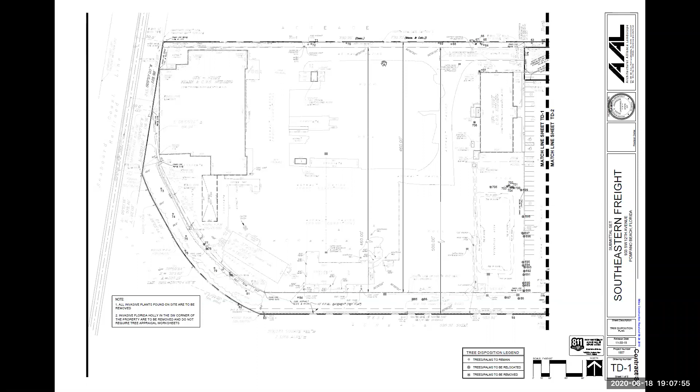You really good, you have to be bigger. Oh, okay. Alright, so I'm sharing my screen, I hope everyone can see it. Now this is a job in Pompano Beach.

This is a TD sheet. If you don't know what a TD sheet is, I'll zoom in here. It stands for Tree Disposition Plan. You'll always find on the right-hand side or on the bottom, depending on the architect, what you're looking at. So this is a tree disposition plan, the date, project number, TD1. It should show you the job name, the address, the location, the set of plans.

It should show you the set of plans you're looking at, and there should always be a column for revisions, sealed. If you're a landscape inspector or plan reviewer, you should want to make sure that it's sealed by the landscape architect. If it's not sealed, it's like an immediate rejection.

Anyway, so looking at a tree disposition plan, you should have a key. That is what every disposition plan has. There are 3 things that all landscape plans have, and these are the most important: a key, a scale, and a north arrow. Every page should have it. If they don't, you'll be completely lost as to where you are, how far things are, and what you're looking at.

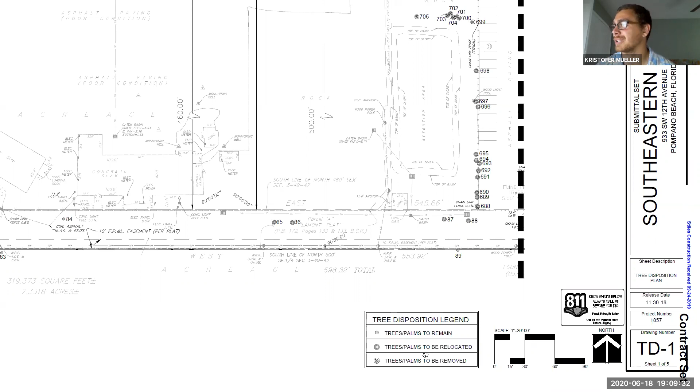So for instance, this tree disposition plan, there are 3 things you can do with trees: they can remain, they can be relocated, or they can be removed. Your scale factor on this plan is a 1 to 30 inch scale. Now on a PDF it looks like you can't really tell if that's right, but when you print this out to size, you could always get a scale bar, and if it's 1 inch equals 30, you go to the 30 scale, and that measurement right here should actually equal 1 inch. And then north is up, so when you're on the job site, you know north is up.

Architects always put notes: all invasive plants found on site are to be removed. Invasive Florida holly in the southwest corner of the property are to be removed. And then here you start your inventory of trees. Each tree is numbered, each tree falls under the index of what's going to happen. So just to recap, nothing around the dot means it's to remain, double circles means it's to be relocated, and an X means it's to be removed.

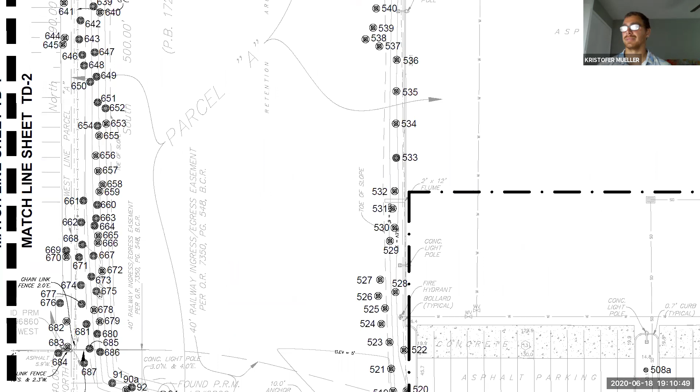So as you can see, all these trees, 85, 86, 533, 34, these are all to be removed. And that way you can see here's a nice big cluster of trees: relocate, relocate, relocate, remove.

And each number will tell you what the tree is and what is going to happen to it. At the end of your tree disposition plan, there should be multiple pages of it, and the last page should show you the list of trees. So here's a pretty big size project, pretty big list: 102 bottle brush, or sorry, just another one, 451 sable palmetto.

So here you can essentially go down the list, see what is going to happen to it, see the comment by the arborist, the species rating, the appraised value. All this is necessary for when you're doing plan review.

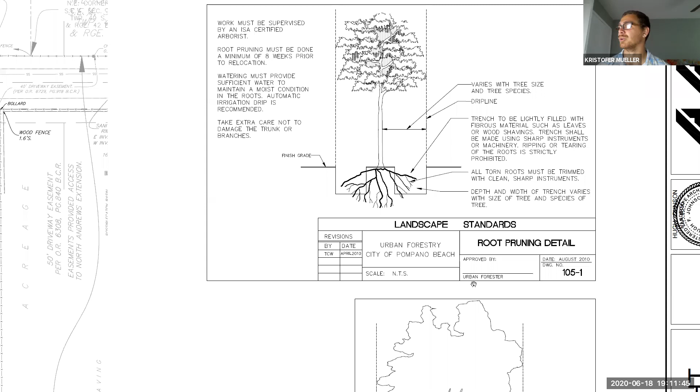Here you can see some details that the architect chose to put, root pruning details. Here they're telling you they want the depth and the width of the trench may vary. All roots must be trimmed. Root pruned out to the drip line, varies with tree size.

Here you have a tree protection detail. Every city has their own details that they want for their protection. This one wants safety barrier fence, fluorescent orange, 2x4 pressure treated. Here you can see they want 2 feet buried under the ground with 4 foot minimum above ground on 4 foot centers. So here they're telling you exactly how they want their tree protection to be. And this is directly pulled from the city of Pompano.

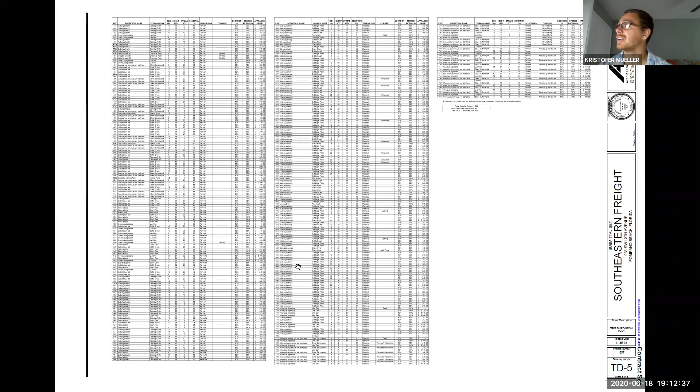Moving on, when you're doing a plan review, if you end up doing this in a city, you can almost always skip to the last page where they have to provide you with a chart. Here, their chart's very simple. Total trees to remain, 564. Total trees to be relocated, 96. Total to be removed, 117. Existing and proposed trees exceed the number of required trees for the site. No mitigation is required. So they're telling you that they've gone above and beyond the requirements of the site for what's to remain, and they're telling you we don't have to mitigate for anything.

Does anyone have any questions on a disposition plan so far?

I lost the chat room. Can you hear me? Yep. No, I have no questions. I didn't know if you could hear me. Oh, yep.

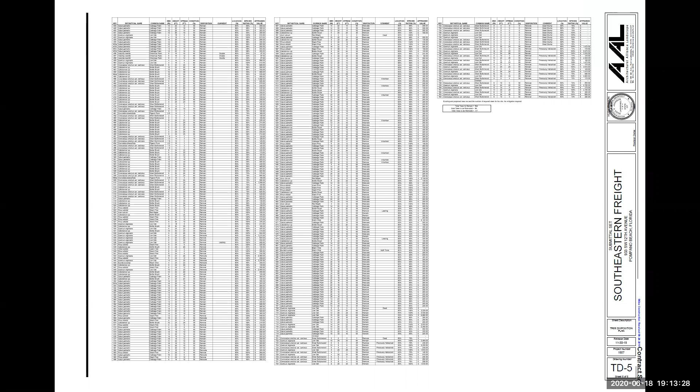Anyone have any questions? No? Moving on.

Just a typical tree disposition plan. What you guys will look for, some disposition plans will show you the new location of all the trees to be relocated. Some of them don't. This one, for example, probably because there's so many things being relocated, doesn't show you the exact locations. If they don't show it on the disposition plan, it's because they're going to eventually show it to you on the landscape plan. So from here, we will go to the landscape plan.

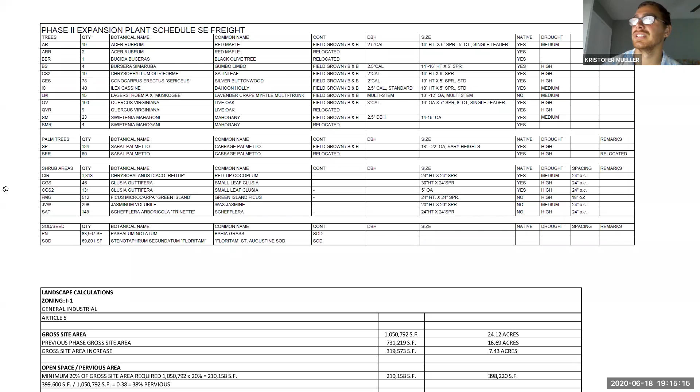Now I'm going to skip to the last page real quick. So here's the last page, and typically you'll find the plant list on the last page of the landscape plan. So here you can see their plant list. It'll always be broken out into trees, then palm trees, shrubs. Usually you'll have ground covers and then sod. Here you can see the code that they'll be represented by on the plan, the quantity of them, botanical name, common name, how they want the tree.

So do they want the tree in a container? Do they want it field grown? Here it can range from field grown, balled and burlap. It can be 65 gallon, 200 gallon, 25 gallon, 35 gallon. This is where they're gonna specify how they want the trees to be grown.

Here you can also see QVR 9 shows you 9 oak trees that are gonna be relocated. So following up from the tree disposition plan, if the oak says QVR on it, you know that it's relocated from the tree disposition plan. Same thing with the mahoganies. SPR is 80, so it's 80 sable palms that are going to be relocated. And then here you have your shrubs.

Container - right here in container, same thing. You'd have 3 gallon, 7 gallon, 1 gallon, 15 gallon. The architect here has chosen to not put any gallon size, but they have spec'd out a height size. So you'll look at cocoa plum, Chrysobalanus icaco. They want it 24-inch height by 24-inch spread, and they want it planted 24 inches on center.

So when you look at the landscape details after, they're gonna want these spaced every 2 feet on center. Clusia, 30-inch, 24-inch. So as an estimator or a project manager or anyone, when you see a 30-inch Clusia, you know that's not gonna happen as a 3 gallon, maybe even not as a 7 gallon. This is where, from your experience or from doing a quick search - I like to use PlantAnt - you can search what nurseries are growing and what their stock is at. You may have to bid it as a 15 gallon or a 10 gallon to get that 30-inch height, because most cities, especially Pompano, Sunrise, Plantation, they'll take out a tape measure and they'll measure your shrubs.

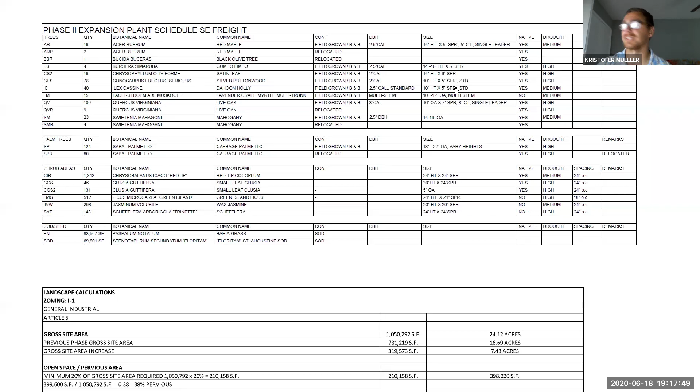We'll go over some quick common examples. Here's a size of tree: 14-foot height by 5-foot spread, 5-foot CT. CT stands for clear trunk, so they want 5 feet of trunk before the first branch comes out, single leader. Here's another: 14 to 16-foot height, 5-foot spread, 2.5-inch caliper. STD refers to standard, so you could have a multi or you could have a standard.

This is just a zoom out a little bit. It's a silver buttonwood, so you could grow silver buttonwood as a bush or as a tree. By putting STD, they're specifying they want it grown as a tree, a standard tree. Same thing with the Ilex cassine, the Dahoon Holly.

Here we have a crepe myrtle, multi-trunk, multi-stem, 10 to 12 foot overall multi-stem. What does multi-stem mean? The landscape architect here hasn't put in how many stems they want. So could a 2-stem crepe myrtle pass in this instance? It sure can, because it's multi-stemmed. Some architects will specify they want 3 to 5, 5 to 7. Here they've just put multi-stem.

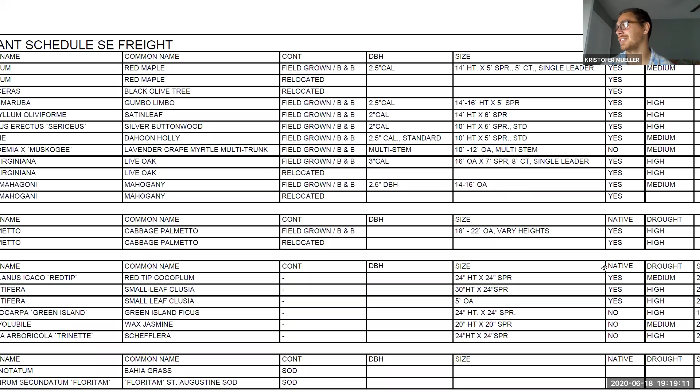Live oak, 16-foot overall, 8-foot clear trunk, single leader. So here you go, this is their plant list, their specifications.

Down here, this is the information that the landscape architect provides to the city in order to speed up and expedite their plan review. So when they submit plans to a plan reviewer, you want to lay out all the information that that plan reviewer needs. So he just has to go down the list and say, okay, check, check, check, check. They met all our codes and everything's good to go.

So here you can see landscape calculations. Here they tell you the zoning. So this is important, what zoning? Is it single family, multifamily, industrial, commercial? Each zoning in your city will have a separate code with separate requirements and separate trees and calculations that you'll need to provide.

So here they're letting you know the gross site area. The site's 24 acres. The previous site was 16, it's increased by 7. Open space pervious area - they need to provide you a minimum of 20% of the gross site. So they're letting you know the minimum is 210,000 square feet they need to provide. They've provided you with 398,000.

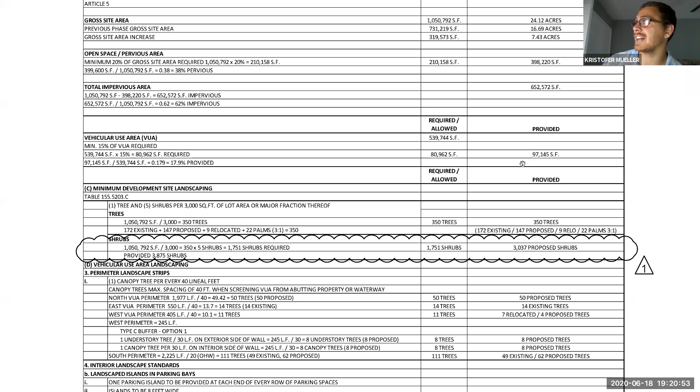So as a plan reviewer, you're going down the list, checking things off. Total impervious area - here they're letting you know the square footage. Vehicular use area, minimum 15% has to be vehicular use. Here they're telling you, you're requiring 80,000. We're providing you with 97.

This is the more important part: minimum development site landscaping. So here's the table that is provided by the city. So as a landscape architect, if I'm working in Sunrise, I'm going to go look at their city requirements and see what they want. Here's my site size, 1 million square foot site divided by 3,000 - I need to provide you with 350 trees. How much are they giving you? 350 trees. There's 172 existing, 147 proposed, 9 relocates, and 22 palms, which count as 3 palms equals 1 tree.

So here, again, they're running down the list of telling you this is what you're requiring, this is what we're providing, and basically saying approve our plan.

Here, a common thing you'll see is when a revision happens. Typically, revisions will happen when plans get rejected from a city. So here you can see it looks like maybe they had a change to their shrubs, because this is revision 1. So here's 1 million square feet divided by 3,000. For each tree, they need to have 5 shrubs - they need to have 1,751 shrubs, and they're providing you with 3,037.

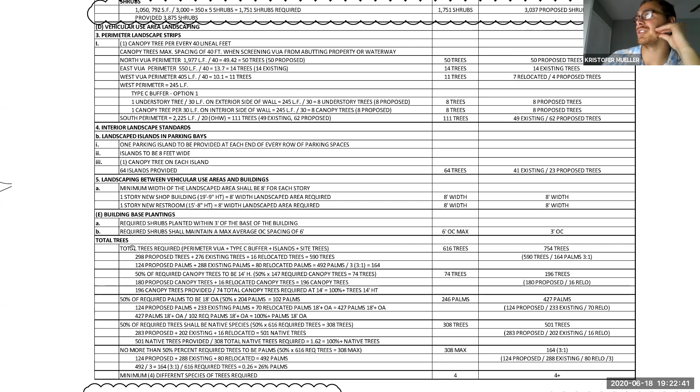More things: canopy trees per every 40 foot of linear feet in the perimeter. They need 50 trees, they're providing 50. On the east side, you need 14, they're providing 14. The west side, you need 11, they're providing 11. So here, they run down the list. Again, the more you break it out and the more the architect makes it easier for a plan reviewer to see it and know that they're meeting all the requirements, the faster this plan will get reviewed and the easier it'll be going forward.

So here you can go down - we're not going to go through the whole thing, but just for example: building base, required shrubs planted within 3 feet of the base of the building. Required shrubs shall maintain a max average on-center spacing of 6 foot. They're letting you know, we did it at 3.

Total trees required, 616. We're providing 754. So here they're letting you know we're meeting all your requirements. Please pass our plan. Here's some more notes.

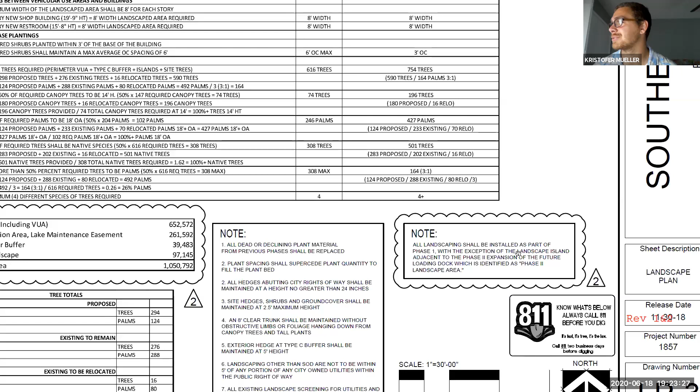All dead or declining plant material from previous phases shall be replaced. These are notes that are always good to have, you always have to read them. For instance, this job is phased out, so all landscaping shall be installed as part of phase 1, with the exception of the landscape island. So they're letting you know they're trying to phase this project out.

So here is page 1 of the plan. I'll go over some more details. Each city, again, has their own details. Here is Urban Forestry, City of Pompano Beach. For single trees less than 4 inches of caliper, this is how they want it staked out.

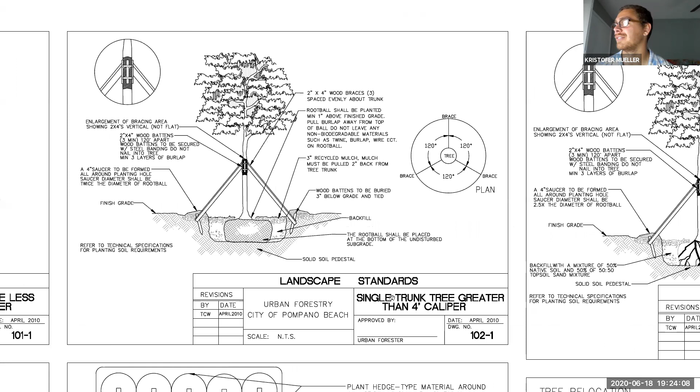They want the root ball placed at the bottom, 3 inches below grade, tied to wooden stakes, clean backfill. Here they're letting you know exactly how they want everything planted. Single tree trunk greater than 4-inch caliper: the root ball shall be placed at the bottom, undisturbed subgrade. So here you go, detail by detail, how do they want these trees staked?

What do they want with their relocations? Let's see, what is this? Plant hedge material around all ground monument equipment, typical for all FPL transformer boxes or pads, telephone and cable boxes, sanitary lift station, irrigation pumps. So here they're letting you know the screening required around all the utilities: a 2 foot offset off the utility, planted, with 3-inch approved recycled mulch. They're letting you know what kind of mulch they want, 3-inch mulch as specified, watered in, clean backfill, 6 inches around all the shrubs.

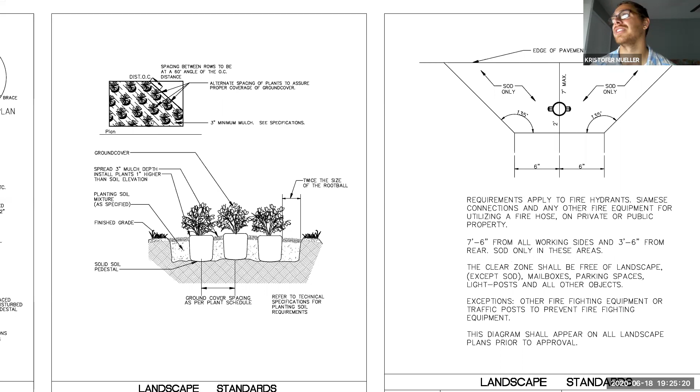Here's a palm, here's shrub spacing, ground cover spacing as per plant schedule. That's what OC stands for, on center, the distance between the center of this shrub and the center of the next. Spread 3 inches of mulch. Here they let you know they want it alternately spaced.

Here's around a fire hydrant. So if you guys have a question that says how far off a fire hydrant do shrubs need to be placed, go to the detail page, look exactly, find the detail for the hydrant. Right here it's letting you know 7 foot 6 inches from all working sides and 3 foot 6 inches from the rear. Sod only in these areas.

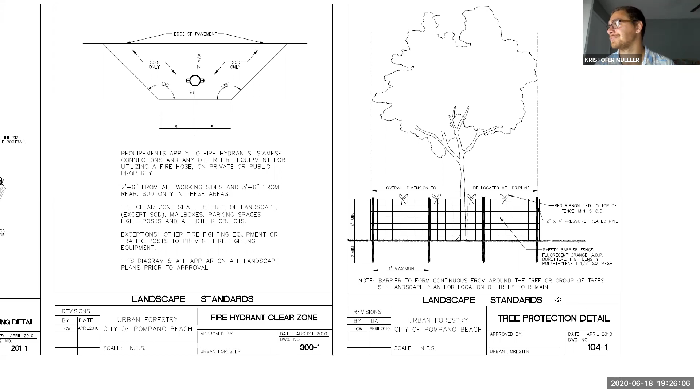If the plan doesn't have a detail like this - and this has happened to me multiple times - we go out there and plant shrubs all around a fire hydrant, and the fire department shows up and makes you rip it all out because, you know, they have rules too. Here's a tree protection detail.

Here's some more buffer details, continuous hedge installed and maintained at 5-foot height. So you can have 4 or 5, as many different pages of details. We're not going to go over all of them, just know that if you do need to find a detail, go back - they're usually at the back of the landscape plan.

So just going now, we'll look at a landscape plan. Let's look at a good part. So here you go, here is a nice piece around this retention that's going to be completely planted. So here we have 6 CES, 13 SPR, 3 CES, 3 SP, SMR1, SM3. Here, SPR - let's look at SPR.

SPR is sabal palmetto, cabbage palmetto, relocated. So they're letting you know right here we want 13 relocated sabals, and they've given you the numbers of the sabal palms from the tree disposition plan that they want planted there. So if you refer back to the tree disposition plan, you have to go find palm 618, 619, 620, 621, 622, all the way to 632, and realize you have to plant them here.

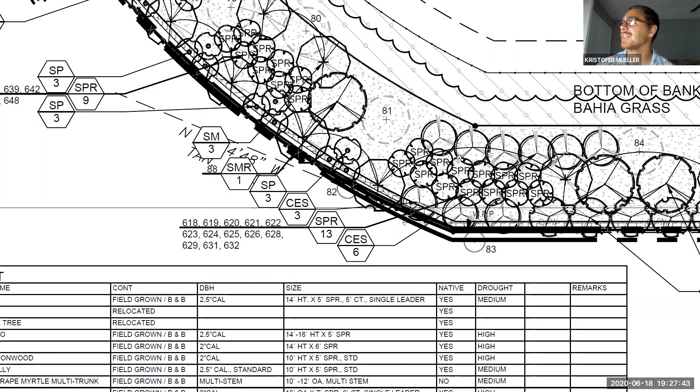Same with SMR, what's SMR? You go to your plant list: SMR, Swietenia mahagoni, mahogany, relocated. Here they want number 88 mahogany relocated to this spot, and so on and so forth.

Landscape plans differ from architect to architect. So this one right here has, let's see, they have trees and shrubs all in one plan. So right here we have CIR 192. You find the arrow, looks like it's pointing at that hedge line. What does CIR mean? Go back to your plant list: CIR, Chrysobalanus icaco red tip, it's cocoa plum. So you know from here, going all the way down, you have 192 cocoa plum. Landscape plans are not always the easiest to plant or to read.

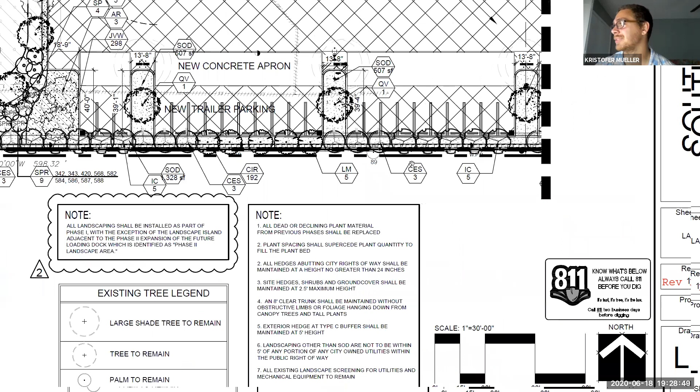There's a lot of information on them. You always want to refer back to your scale bar and your north arrow. When you're planting these trees, the spacing is intentional. So when you're on site, you take out your scale bar, you see it's 1 to 30, you put the 0 right here, you measure to here - looks like it's 10 feet. So now you know every tree is planted 10 foot on center.

Landscape plans also will show you utilities, overhead lines, easements. They'll show you everything that you shouldn't be planting in.

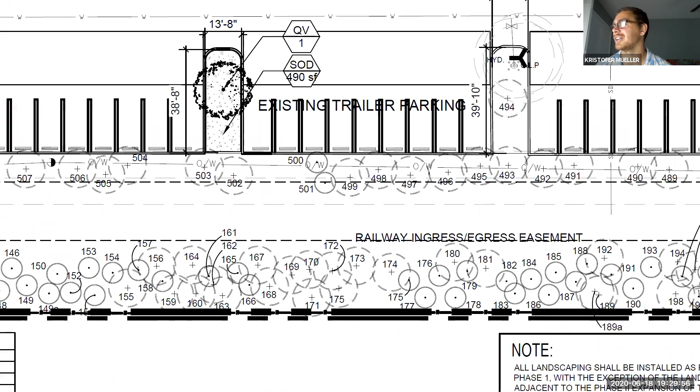Let's see if I can find one here. Right here, so here you go. This strip in the middle of this project is an existing retention area. Why is it a retention area? Railway ingress easement runs this whole length, so nothing can be planted in this easement. You take out your scale bar, measure it, looks like it's 60 feet. You have a 60-foot easement running.

You want to look at the overhead line. Here you go, O/W, overhead wire. Looks like there's a post here, this is a sign for a post. You'll see overhead wires running across this entire strip. So as a landscape plan examiner, if you have overhead wires, what's your initial instinct? Well, what are they planting underneath my overhead wires? Because FPL has a guideline as to what can be planted.

LM and CES, so we go down here. We look, CES silver buttonwood, LM crepe myrtle multi-trunk. You can pull up FPL's guide for planting under power lines. I'm pretty sure those are both category 3. Crepe myrtle is a category 3 tree, silver buttonwood might be category 2. So they're all within the guidelines that can be planted underneath overhead wires.

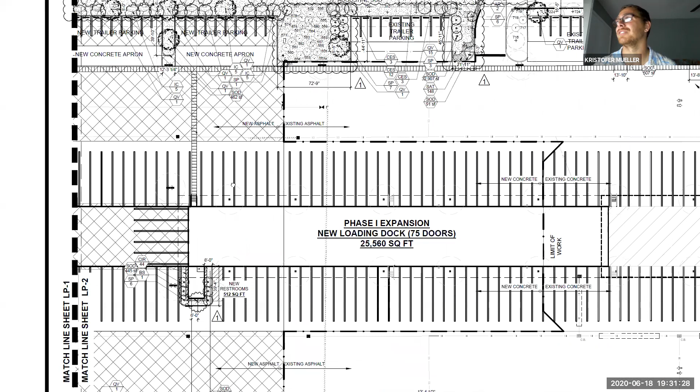If you don't catch that, I'm sure someone will as a plans examiner. But as an installer out on the field, you definitely don't want to be planting oak trees underneath power lines. I'd hope we've passed that point in development where we stop planting oak trees underneath, but you'd still be surprised.

Let me just go down my list. Yep, so this is a landscape plan, more or less simple. Here you can see existing tree legend, large shade tree to remain, palm to remain. So it looks like most of this parking lot is left untouched. Landscape areas in the east parking lot are all existing perimeter buffer, so they're letting you know nothing here is getting moved. There's some new stuff coming in, new trees along this whole side.

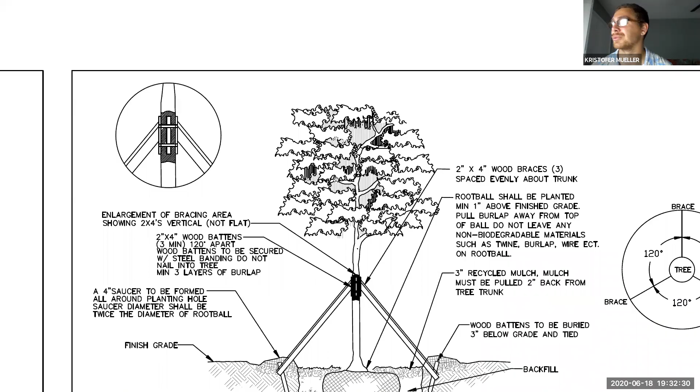SS, this stands for another utility. Not sure off the top of my head, but I'm sure it's something important. Sanitary sewer, probably. So that is a landscape plan.

One sec, stop it. Does anyone have any questions? Yeah, I do. Go ahead.

Okay, I was just looking at the plants. The clusias aren't native, and they call them native. Yep, they call them native. Only rosea is native.

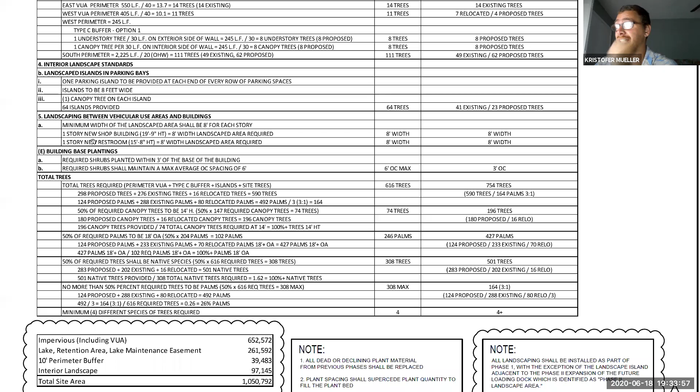But the clusias were 5 foot, weren't they? Let's see. Yeah, 5 foot overall clusia. So that's huge, they still have it as a shrub. I'm sure they probably wanted a huge hedge, planted 24-inch on center. So that's going to be a really tight screen. Yeah, real tight, but good catch.

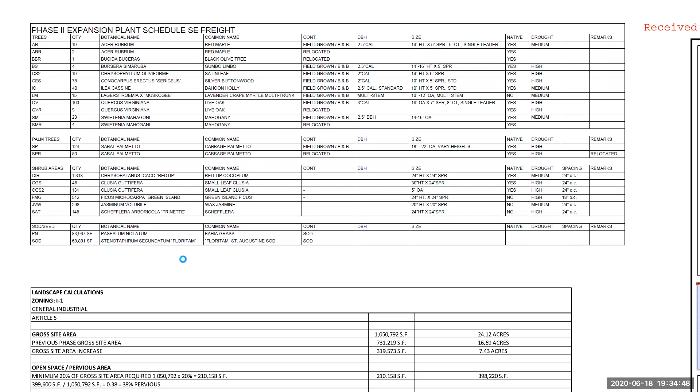Thank you. Does anyone else have a question? Yeah, go ahead. What's the general guideline for the relocated trees? Do they say like 6 weeks root prune in advance, or is that specified by the architect?

Cities will have their own requirements, and architects will also specify it. Let's see if we can find one on this document.

So yeah, here you go.

Typically you'd find that in a detail. I've always done 6 to 8 weeks, depending on the tree. I'm sure it depends on your city again, if they're stricter or a little more lenient.

But in a strict city, especially Pompano, they're going to have it documented somewhere on the plan, because if it's on this plan, they expect the contractor to follow these rules. And if they don't, it's plain as day: your tree died because you root pruned it and waited 3 weeks, even though you didn't follow the detail on the plans.

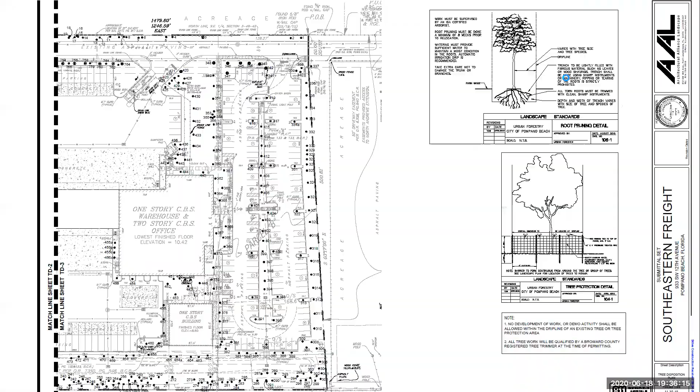Is the root pruning first done with like a small backhoe and then the cuts are cleaned up, or do they do it by hand? Or does it depend on means and methods with the contractor? That is means and methods.

Usually they'll refer to the ANSI A300 book for best practices. The way I personally do it with my company is, if they're large trees, we take a mini excavator out and trench around the drip line, then go back in about a foot to 6 inches so we can find where the root was damaged with the mini excavator, and then make clean cuts there. That's how we do it.

All torn roots must be trimmed with clean, sharp instruments. So essentially you trench all around it, then go back into the part that wasn't damaged, and just make a clean cut to it.

I have a question. I don't know if you do this with your company—prior to actually beginning to remove the trees for relocation, do you label them? So that if it's labeled, like palm tree 684 is supposed to be moved from the northwest to the southeast corner, you actually know what you're doing? Or is it just kind of, just make it look good?

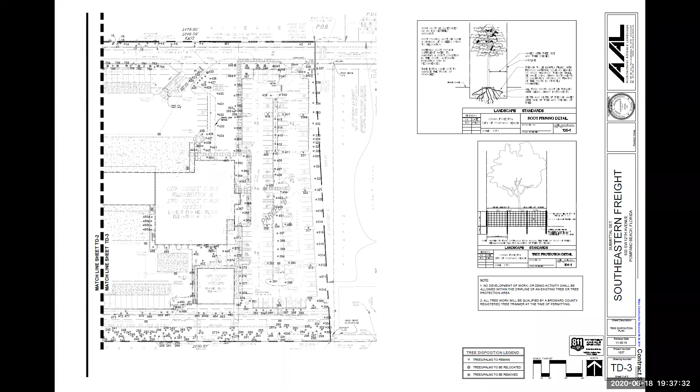I think I've had the luck that I'll show up to a job site for a new job we just got contracted for, and when I get there, every single tree is tagged with a little aluminum label with a number engraved on it, which makes my job 100 times easier. I just finished a job.

We did it back in November—we relocated like 60 trees from Port Everglades in Fort Lauderdale to around 15 different parks all around Fort Lauderdale. It was one of the most complicated things we did, because the company reached out to the park supervisor for Fort Lauderdale and said, hey, we have all these trees we're getting rid of, does anyone want anything? Everyone was like, sure, I'll take palm tree 241, 117, 69, and 4. So every day it was finding those numbers, loading them on one truck, taking them to that park. It was just a jumble back and forth.

I've also had the issue where, like this job for instance, my first time out there was on Monday, and there's not a single thing labeled. I had to go out there and look for everything—I'll show you these. This building right here is actually an abandoned warehouse. There were maybe like 3 homeless people living in here.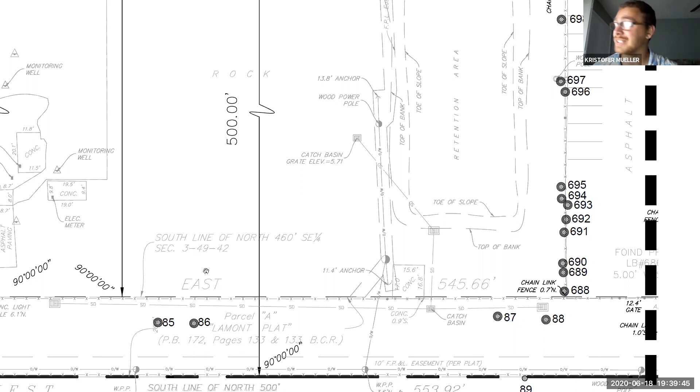To answer your question, for this job the way I'm going to do it is label the trees and make sure each one goes to its specific spot, like the mahoganies. As far as the sabals go, I'm just going to pull them all out and plant them, since there's 80 of them, and I don't think anyone's going to mind if one sable's there and one's not. The oak trees though, we'll try to keep in their intended spots since they're specific.

Does that answer your question? Yeah, so it seems like you just have to have a good knowledge of the authority having jurisdiction you're working under. Correct, as well as the species. The easiest thing to do would be to request a pre-construction meeting with the city.

Request a pre-con meeting, or even call in like a job check inspection and just ask the inspector, hey, there's 80 sabal palms here, do you really mind which sables go where? I don't know anyone that'll say make sure each one goes exactly where it needs to go, because even in this group of sables here, it doesn't really say which number goes where. It's letting you know we want these number sables here, but it's not telling you which sable is which one.

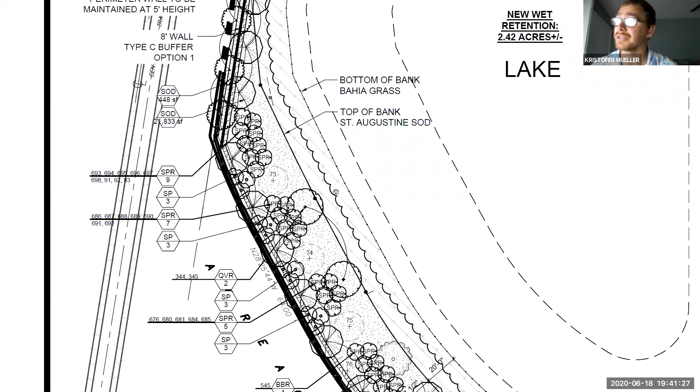Yeah, I understand where you're coming from. My thing is always developing a relationship with your inspector, or if you're an inspector, developing a relationship with the contractor where you let them know your expectations. And there's always some leeway because nothing can be done perfectly. These two mahoganies that are relocates, we'll make sure these go here, but sable palms, yeah, we'll probably end up just moving them wherever. Any other questions?

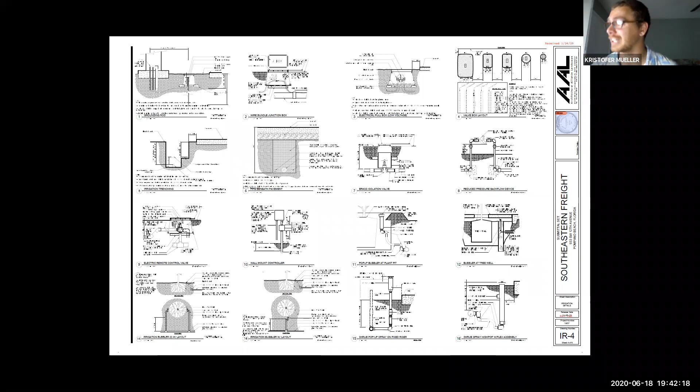Last thing we're gonna review, which might or might not affect you guys, but I know it's gonna be on the test and I wanna go over it with you guys. You're going to have to look at irrigation plans. I don't know if anyone's worked with irrigation plans before. If you've never seen an irrigation plan and you look at one, you're gonna be like, what the heck am I looking at? If you've seen them, they're a lot easier to look at.

We'll start on page 1. Same thing, scale bar, north arrow, drawing number. Here they have a simple chart letting you know the sleeving schedule. So if the pipe size is a 3/4 inch pipe, it requires a 2-inch sleeve. They'll give you separate sleeve labels. So if they have a sleeve that says 12-inch, 6-inch, 2-inch, they mean to install one 12-inch, one 6-inch, and one 2-inch.

Let's look at, I'll go to the back first and show you. I have a question on that if you don't mind—I actually do quite a bit of irrigation, but by sleeve you mean just under concrete, some kind of concrete hardscaping? Correct, yeah. Sleeving is usually just under sidewalks, under concrete, under hardscape.

Okay, the rule of thumb is usually double the size of whatever pipe you've got to put in, so 8 for 4, 16 for 8, 12 for 6. For anyone that doesn't know anything about irrigation, when the road is being made and you have to cross a pipe underneath it, if your main line is 4 inches, you dig through the lime rock, put in an 8-inch pipe so they can put their lime rock over it, compress it, build their road, and then come back and squeeze in your 4-inch pipe inside that 8-inch. It's like a protective pipe you're putting in just to hold the place of that main line and protect it from anything breaking it.

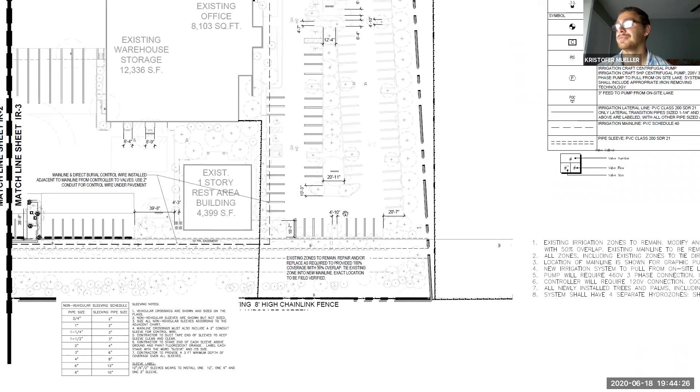I have another question on that, Kristofer—this probably isn't anything to do with your test material, but just real life practical examples. Since your company mainly does landscaping and irrigation, do you guys make sure you have somebody on site when they're doing road prep and paving, just to make sure it's in there? Or is that the contractor's responsibility? No, as Dixie Landscape goes, we always include sleeving in our contracts.

It's probably the part that demands the most communication in any part of the project, because you're usually not there every day since there's nothing ready for a landscaper to do. But as soon as I get a contract for a job, I try to be out there that same week just to introduce myself if it's someone I haven't worked with, or see who's running the job if I have, and exchange contact information. They'll let me know, oh, we're going to be working on the east parking lot the 18th, so you have to know that.

We have to check for sleeving, and there are certain things you can request or see if they're in your scope. Here's an example: if this parking lot was brand new and they were building it, and I knew I had a sleeve that had to go across this roadway, I'd say let me know when you're doing the parking lot, and stake out the island for me—so they'd stake out this island, maybe a corner here, here, and here.

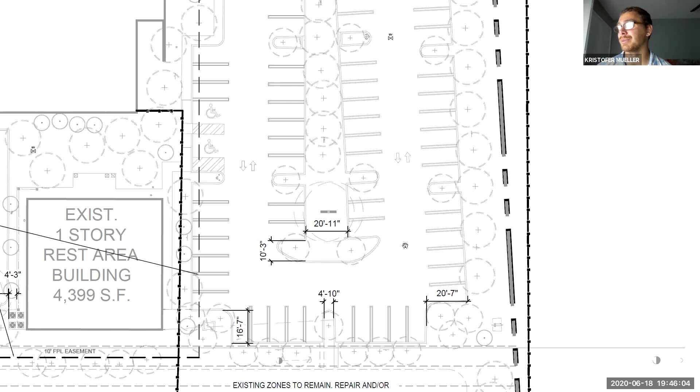And then my guys would come before they put their lime rock down and throw the sleeve wherever it marks on the plan. So that part is all communication between the contractor and the general contractor. Here's a 2-inch sleeve, I believe this is all existing roadway. I don't know if they're going to redo this, but if they don't, we run into that issue a lot, especially on redo jobs, where irrigation goes where it shouldn't, and sometimes you'll have to cut the asphalt, trench it out, put your sleeve in, and then they have to patch it up. That's just the way it goes sometimes. Or you can jack and bore it underneath the roadway, but that's really expensive.

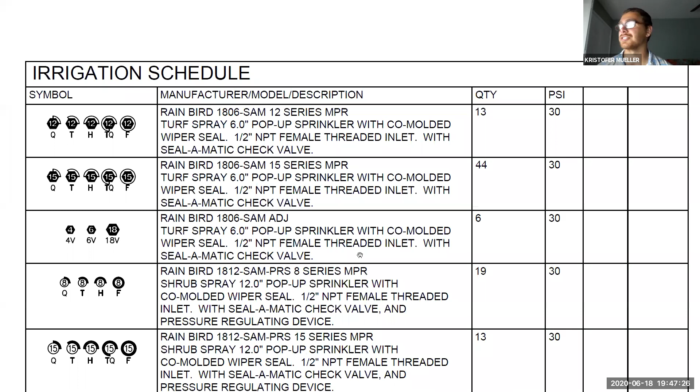So here is an irrigation schedule, and it might look like gibberish to some people. Here's where they spec out the company they want, the manufacturer, the model, the description. They want Rain Bird 1800 series SAM MPR heads, a turf spray 6-inch pop-up sprinkler. So they're letting you know it's buried underground and will pop up 6 inches when it comes out, with a co-molded wiper seal. These are just all different things. And then here you have the nozzles.

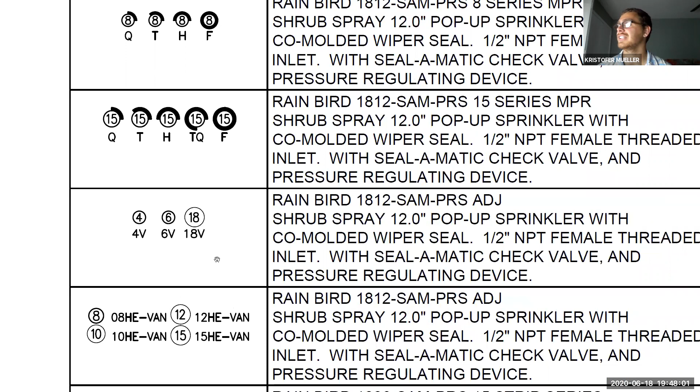Some people don't specify nozzles, some make you figure it out for yourself. But if it has a 12-foot Q, it's a corner that shoots out 12 feet. You have a T, which is a third that shoots out 12 feet. Here you have a TQ and a full, which shoots 12. You have 15s, 8s, more 15s, 4s, 6s, 8s. So this is just letting you know.

Here you have strips. So strips are when you have maybe a 2-foot wide area of grass, you need to put an end strip that just shoots out a little thing. This is letting you know what nozzles they want on which heads.

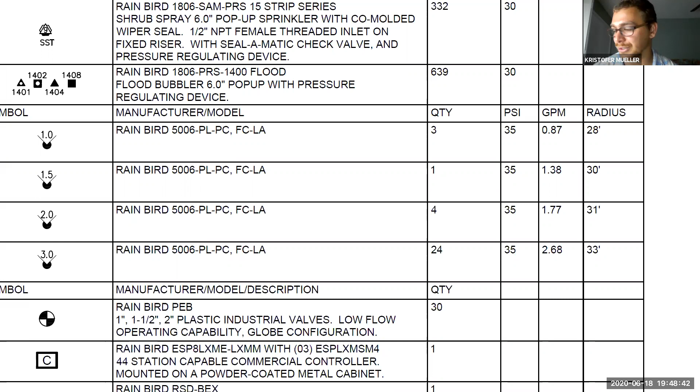Here you have bubblers, so here you have Rain Bird flood bubblers. Here you have Rainbird 5000, these look like rotors. And as a contractor, one thing I hate the most is you have to do submittal documents. So when you get a contract, the general contractor will always ask you for submittal information. So you have to go on Rainbird's website, look up the 5006 PL PC FC LA model, download the submittal documents that they request, and then submit it for each single thing.

They're letting you know here the radius of these rotors and how many gallons per minute they shoot out, and the PSI, which is pounds per square inch of water. So here they're giving you a lot of information, which usually they don't need to. They're letting you know exactly how many heads there are of each kind - you rarely see that - and how many pounds per square inch each head requires.

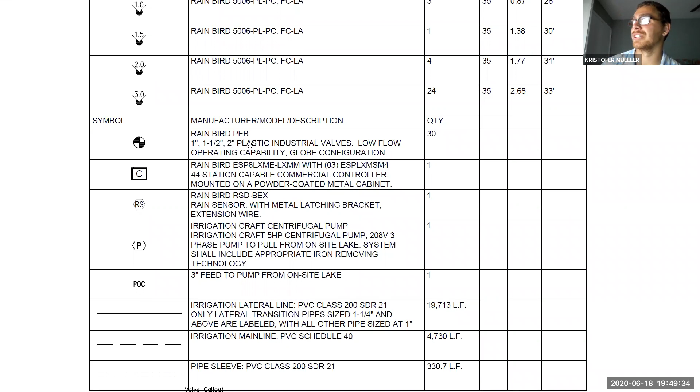Here they're showing you valves. So they want the Rainbird PEB valves, 1 inch, 1.5 inch, 2 inch plastic industrial valves - there's 30 of them. They're letting you know exactly which controller they want: a 44 station capable controller, the ESP8 with 3 modules, so each module adds 4 stations to it. They want a rain sensor.

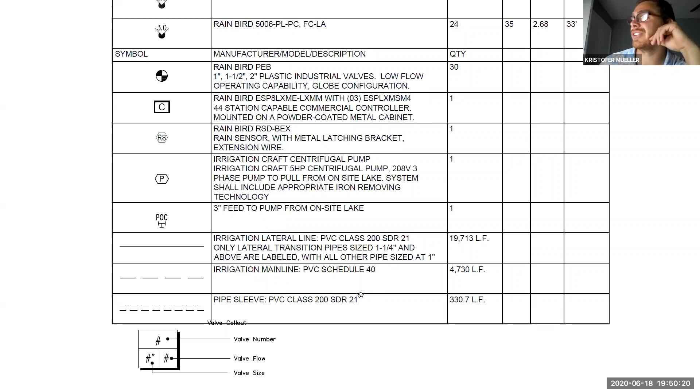Here you have a pump, so an irrigation craft centrifugal pump, 5 horsepower. Pay attention to this, because when you're bidding a job, or looking at plans as a plans examiner or landscape inspector, you might not worry about the pump size, but you really never know. Here they've even gone to the length of letting you know how many feet of main line, how many feet of lateral lines, and how many feet of sleeving they have. As an estimator, this is like your birthday, because you just use their numbers - every contractor bidding this job is bidding it off these numbers. They want to know apples to apples, what are they providing you with.

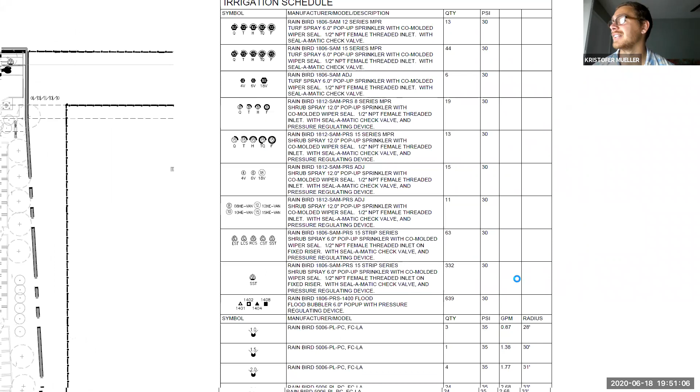Here you have, and this is important, the valve markers, the valve callouts. They're letting you know the valve number, the valve size, and the valve flow. So this is letting you know this is zone 1, the valve size - which here we know there's 1 inch, 1.5, and 2 inches - and the valve flow. Depending on how many heads this has, how many PSI, how many gallons per minute, that will determine the flow. So to give you guys a quick example: if it's valve 1, that's a 1 inch valve, and it's got 4 rotors on it that give you 1.77 gallons per minute each, you multiply 1.77 times 4, and that lets you know how many gallons per minute that valve is putting out.

Common notes are existing irrigation zones to remain, modify and/or adjust to provide 100% coverage with 50% overlap. That's a typical note - in every city you go to, they want overlapping coverage.

Pump shall require 460 3-phase connection. Controller will require - so they're letting you know the electrical. System shall have 4 separate hydro zones: shrubs, turf, rotor, and bubblers.

This is a new kind of plan that people are designing now. They have zones specified for each specific thing, so they're letting you know they'll have a valve that only waters shrubs, a valve that only waters grass, a valve that only waters grass with rotors, and valves dedicated completely to bubblers.

It makes it harder to install, but it makes it a lot easier to maintain. After a year, if you're done with your bubblers, you simply shut those valves off, remove the time from the timer, and now you don't have any bubblers anymore instead of having them mixed into the system.

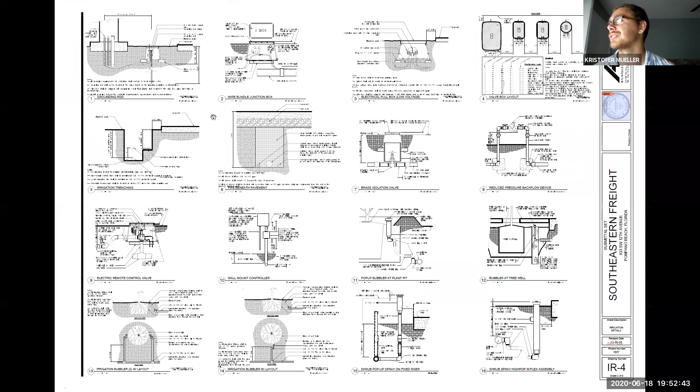So we'll just go - here are more details. Hey Chris, I have a question again on that. Go ahead. Okay, so for the typical contractor, it's not our responsibility to figure out if the pump is appropriate to whatever heads or rotors are put on there.

Let's say you have a 2 horsepower pump and you've got 10 rotors and 10 pop-ups - chances are it may not be able to actually physically support that many gallons per minute. That's an engineer's job, that's well beyond - right? I would assume it's not necessarily the inspector's job or the contractor's job. You're just doing what somebody else has supposedly mathematically calculated. Correct, and that happens all the time.

Not as much as you'd like it to happen, but you're right - do people design plans that don't work, is basically your question? And the answer is yeah. They could put way too many heads on a zone and there's not enough pressure, and there's going to be areas that start drying out of sod because there's not enough pressure, because they put too many heads. Or the pump could burn out because it's a 2 horsepower pump supplying a giant system.

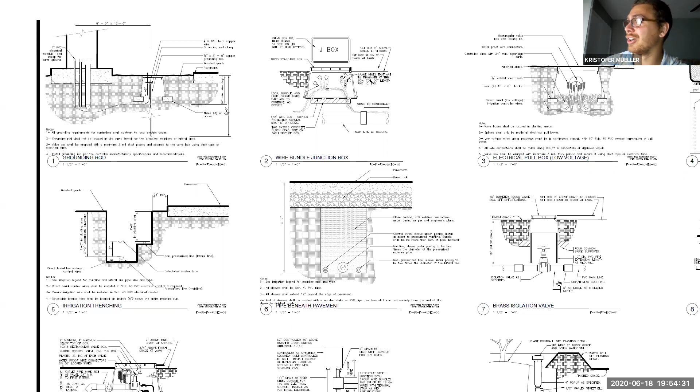I just had a job where we had a 10 horsepower pump and it was spec'd with a 15-gallon rust inhibitor tank. So that pump was draining that rust inhibitor tank probably every week, and nowhere on the contract did it say we had to be there weekly to refill that tank. So they started complaining - why is there rust everywhere on the site? Because it's drawing from a well. Oh, we have rust stains. Why is this tank always empty?

And so your answer as a contractor is: it's installed per plan. You're installing what you're contracted for, which is the plan. Oh, you want to change it to a 200 gallon tank? That's a change order. Your zones don't work, you need to upgrade your pump, you need to upgrade your valve size - it's installed per plan. You want us to change it? Change order.

I have most of our foremen - they've been irrigation foremen for like 20 plus years, and they can kind of see a plan right off the bat and let you know if it's going to work or not. I know most of my foremen, I could say, how many heads can I put on a 2-inch valve? And he'll say, what's the pump? 10 horsepower pump. And he'll say 50 to 60 heads, depending on the nozzles. So they know, and they add heads too if they think coverage isn't going to work. We lose a little more money doing that, but it keeps the reputation of our company.

Okay, thank you. No problem. Kristofer, I have a question too.

Go ahead. So you kind of said like with the sleeves and all the lateral pipes, it was kind of like a birthday gift - they figured that all out for you. And that kind of goes with the plant counts too, like hey, we need like 1,200 of Green Island ficus. Well, you can't really go by what that plan says because ultimately you've got to count up. That architect could make a mistake on any one of those numbers, and you're kind of responsible for not reviewing the plan and just bidding off his numbers, where you could get kind of, you know, screwed in the long run, right?

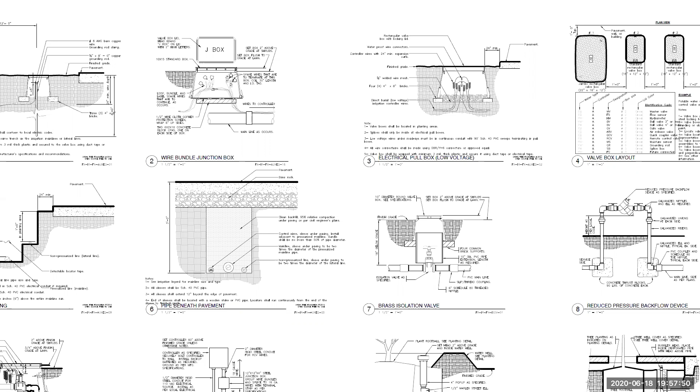It's like a running joke in our company because I was an estimator, and as an estimator, I made my count of estimating errors, like missed trees, missed shrubs, and then the project managers would always come back and be like, hey, estimating error, you didn't bid these 15 trees, you didn't see them on the plan.

And that just comes out of your paycheck, though, right? Yeah. No, so as an estimator, the more pressure you're under and the faster you need to turn around with a bid, the more room there are for errors. If they had all the time in the world, they would do takeoffs on every plan and make sure everything is as good as it gets.

And to your point too, it could also kind of screw over a contractor in getting rewarded a job. That's happened to us as well, where we'll bid a plan and notice maybe 20 oak trees that weren't called out on the landscape plant list, but they're on the plan. But another contractor just bid the plant list. So 20 oaks by $500 is 10 grand. Their bid is 10 grand cheaper than ours because they didn't catch those.

And yeah, in that case, there's not much we can really do about it. Are they gonna come back later and request a change order, or are they gonna eat it? We've had to eat it. We eat money all the time, and it's a balance.

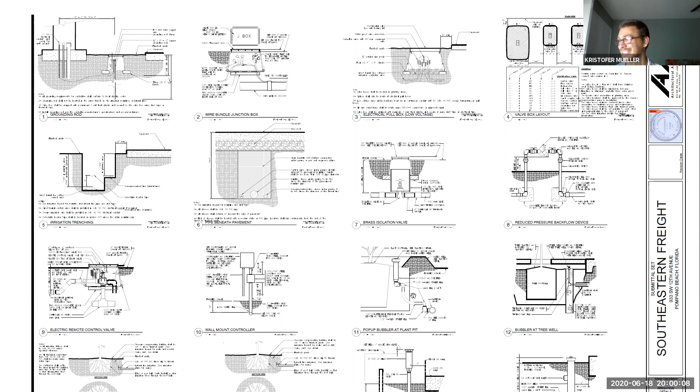No, and we get bids that they'll send us a bid the day before, and they say we really need this by tomorrow. Is that estimator gonna pull an all-nighter, making $40,000 a year, to get an accurate bid? No, he's gonna look at the plant list and get it as close as he can.

But yeah, just to continue, here you have details, pretty much of anything that they spec'd out on that plant on the irrigation list. They should have a detail for it. So here's a pop-up spray on a fixed riser next to a curb, a pop-up bubbler at a plant pit, how they want the controller mounted, the valves, irrigation trenching, piping beneath pavement.

So here is how your sleeves look. Pay attention always to what kind of pipe. So they want Schedule 40 PVC pipe for the sleeves. It could be Schedule 40, it could be Class 160, there's different sizes of pipe. Here they have the boxes for the valve boxes, they have the backflows. And then we'll just take a look at the plan itself real quick.

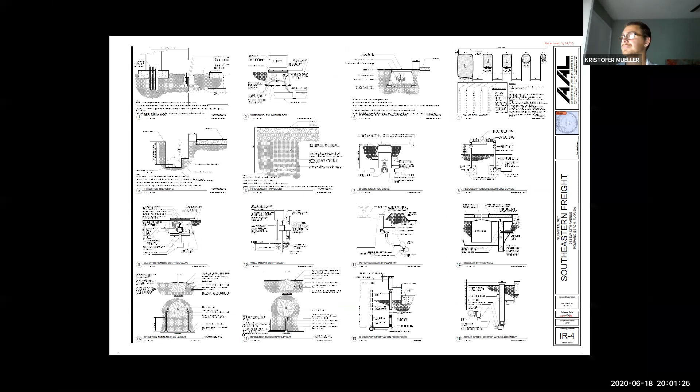Yeah, so these new plans that people are making, they have dedicated zones to bubblers. So when you're installing it, you got this valve and you'll find the line coming out of the valve. It's a 2-inch line leaving the valve. That's a 2-inch valve, zone 2, 45.0 gallons per minute.

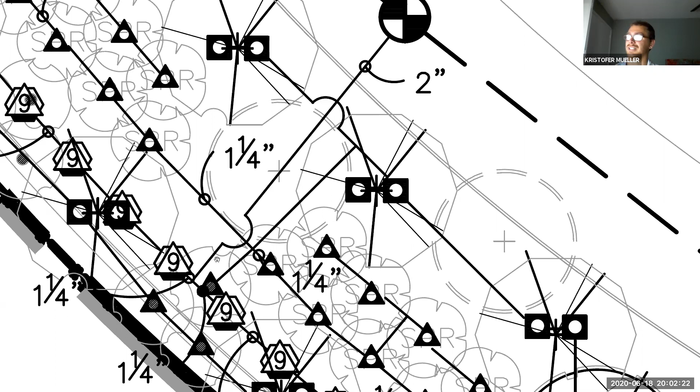And then it lets you know this 2-inch pipe changes to 1.25 inches. It has all these bubblers, still 1.25 inches. They'll tell you the measurements and breakouts. This loop right here, when lines intersect each other, so there's no confusion, they'll typically loop it over, just so you know this line coming from here isn't part of these bubblers. It's coming over here, and it's these spray heads. So I don't think you guys will get too many questions on irrigation.

Some things you've got to look at: always look at the details, always look at the sleeving, know where your indexing valve is, or your valve. Follow the details. The scale, I mean, that's the most important thing, scale and north arrow.

Sleeves, irrigation. Here you can find your pump location. So here's your pump, rain sensor. You can see it's drawing out of the lake. Point of connection right here in the middle of the lake. Main line and direct burial.

Irrigation plans, they're simple, they're not confusing. They'll always show easements as well. I saw one on the other page. You have a 10-foot gas easement. They'll give you some measurements here and there.

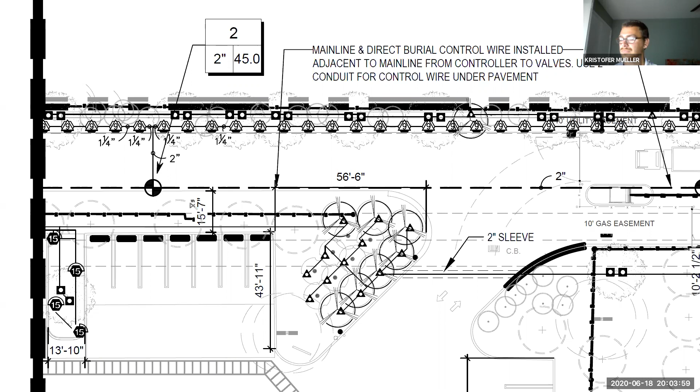Let me just go over this to make sure I covered everything for you guys. Yeah, that's pretty much it, guys. I think we're looking good.

You have your landscape plans. You got your tree disposition plans. Look at your zoning, look at your sizing, your spacing. Look at your existing trees, what's gonna happen to them. Look at impervious, the square footage of the building, 8-foot clear trunk shall be maintained. Just different things, and that's pretty much it.

Do you guys have any questions for me? I have one. Go ahead.

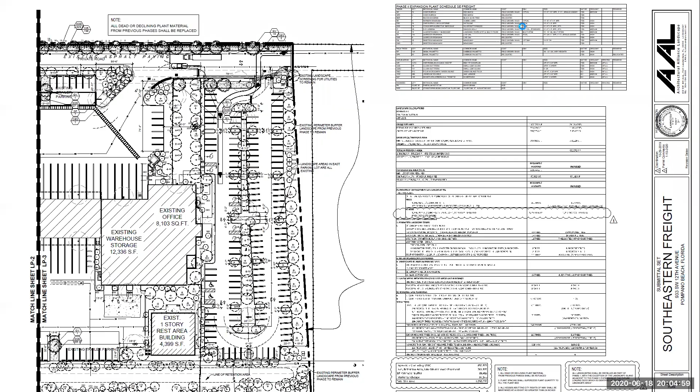On the caliper of the trees, it doesn't specify DBH, so that automatically means 6 inches above grade for anything under 4 inch, right? Correct. If it's DBH, so here you go, it says DBH. So if it says caliper, it's 6 inches above the ground for anything up to 4 inches, and 12 inches above the ground for anything above 4. If it says DBH, then it is DBH, which is diameter at breast height, I think about 4.5 or 5 feet above the ground. But caliper is caliper, and then DBH is DBH.

Okay, so only the mahogany they're calling DBH. Yep, that's the only one they want to look at DBH on.

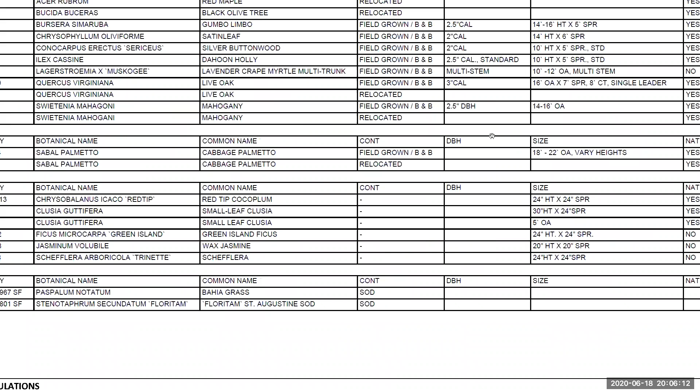2.5, okay. And then one question you might get asked is like, if you have a multi-trunk crepe myrtle that wants a 3-inch caliper, how do you find the 3-inch caliper on a multi-stem crepe myrtle? Isn't it the total sum? Yep, so if you got 3 one-inch stems, there, 3-inch caliper, right. You said the tallest stem, right? No, no, it's the sum of all the stems for a multi. Oh, the sum, okay, yep.

Yep, yep. Anyone else have any questions, guys?

I lost the chat window, so I don't really know if anyone said anything in there. Hey Chris, Susan. Yep. Hey, well I just lost mine, is there a list of competencies that we need to know from these plans for the exam?

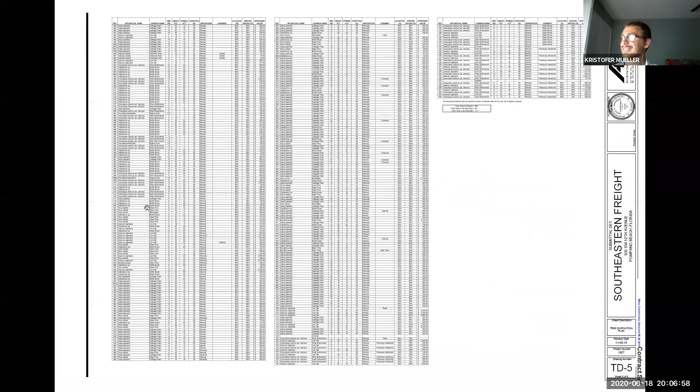I have the review questions. Kevin told me not to give them to you guys, but if you were paying attention, I guarantee you will ace the plan review part of this exam. All right, thank you. No problem.

Just, if you guys have a pen and paper to write down, I'll give you key notes that I made sure to go over with you guys. Zoning and code requirements is one. Finding your scale and your north arrow. Finding your plant list, your size, your spacing, your shrubs, your trees, tree dispositions, knowing relocates, removals, and remains. Being able to find utilities and overhead lines on a plan.

Looking at irrigation plans, being able to find where the pump is, identify how many gallons a zone is going to provide, what size sleeves are, and looking at details. If you guys study those points, or if you feel comfortable with those points, I'm sure you guys will do great.

So overall, the answers are going to be on the blueprint. Yeah, everything you're gonna need is gonna be on the plan. I can give you guys a sample question. Let me see if I can.

So a sample question will be something as simple as: how far from an FPL box do your plants need to be? And so you'd go to your planting details and find the FPL box and find the detail for it. Another one might be: how far apart do your Green Island ficus need to be planted? And you would go to your plant list, find it, find your Green Island ficus, and look at the spacing of it.

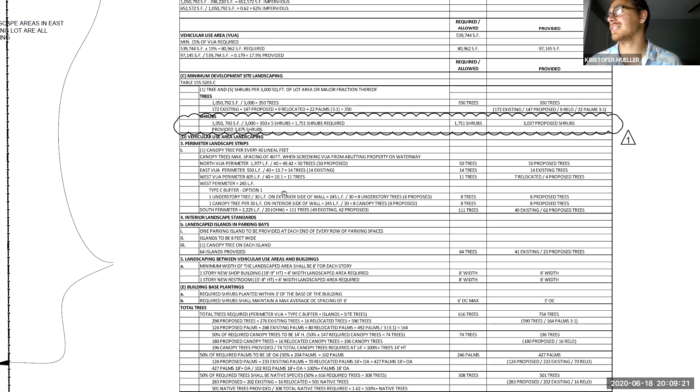Just being able to know how many trees are being relocated, how many are staying, knowing on the street side, on the street trees, knowing how far these street trees need to be planted. That could be a sample question, and that would typically be in this box they provide you, that they need perimeter landscape strips, so they need one every 30 linear feet, one understory tree. So just being able to identify things. Everything is going to be pretty simple.

You know what's going to happen to tree number 447? What happens to it? That's as easy as going to the tree disposition plan, finding it on the list, and seeing what happens to it.

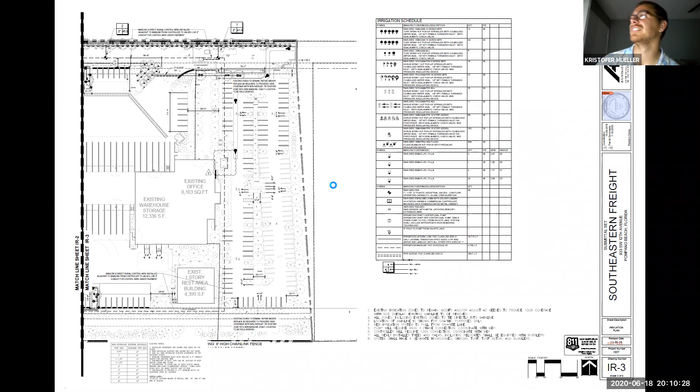Or, for example, the irrigation plan. If they ask where is your water source, the answer could be on the south side of the building, on the west side of the retention pond, or on the north side of the building. These could all be answers. So finding that source and picking the answer you think is right. For here, it looks like it's on the north side of the lake. That would be my guess.

I have a question. Go ahead. Just out of curiosity, in some of these parking lots you'll see they plant a large caliper tree in a very narrow island with curbing. Do they use any of those root zone control collars in parking lots to make the roots go deep below the asphalt? Yes, what you're referring to, sir, is root barrier. If a project calls for root barrier, or what we've been doing lately is structural soil, depending on the city you're in, they'll always call for it, and that'll also be in the details.

Let's look in here if you see any. I don't see any details for root barrier. Is that typically like a plastic liner?

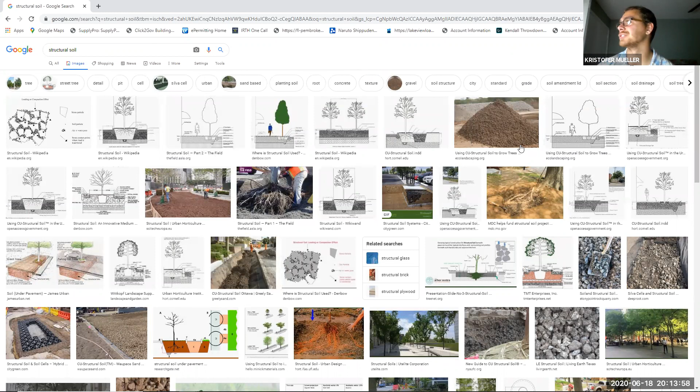Is this some sort of pre-emergent or something like that? Yeah, something like that. I think I've only used it once in my life, and I don't think I've ever seen it spec'd out. For anyone else who wants to see the new thing being used - Fort Lauderdale is requiring it a lot - it's structural soil. It's essentially just like a dirty rock, like 57 rock tossed in with muck, and you install it underneath sidewalks, underneath patios.

This is Silva cells - that's something else. But with structural soil, when they're getting ready to do the sidewalk, depending on the plan, you'd excavate it out 30 inches and install this structural soil. The theory behind that is over time the water will cause the muck to deteriorate, leaving gaps in between the gravel for the roots to grow into.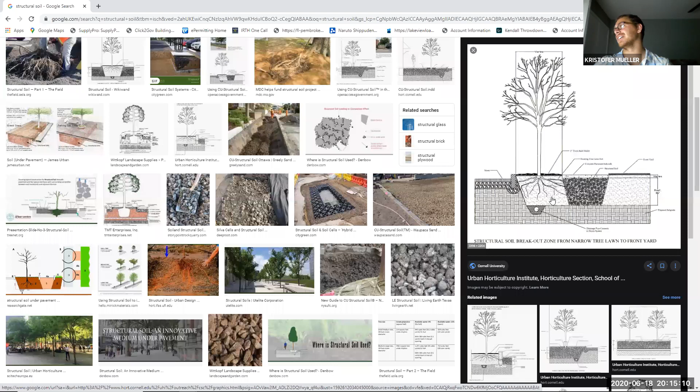So instead of what happens with just lime rock - as you guys know, let me see if I can find a good image - the root will hit the lime rock and then go upwards, and the only space it can find is between the asphalt and the lime rock base. That's why you always get those cracks in the road and lifted road. What the structural soil is hoping to do is eventually provide air holes underneath it so the roots can wiggle their way into the structural soil.

And that's been proven to work? It's been proven, I think so. If you ask the guy who invented it, I'm sure he'd say yes. I haven't been around long enough to see if anything I've installed really works or not.

And I'm telling you, the last time I used it was on a job in Fort Lauderdale, where we planted oak trees in maybe a 3-foot area between a curb and a sidewalk.

Which we tried to get out of, because we knew it was a horrible idea, but they insisted that because there's structural soil there, it would be a good idea. But yeah, we'll see if it works. I'll let you know in 20 years when I go back to that job site.

Yeah, I've seen it used all the time. Every time they plant anything, it's structural soil first, and they use it all the time. It's super expensive, and it's really just dirty rock.

But the one thing I really like, which is really expensive, is silva cells. If you guys ever have time, do some research on it. It's essentially like suspended pavement. They put these cells underneath any pavement, then fill it up with clean soil and cover it. So you'd put your sidewalk over it, and it gives the tree space to grow underneath. It's really cool, really expensive. They're doing it a lot on the beach and places like that, and it's rated enough that cars could drive on it.

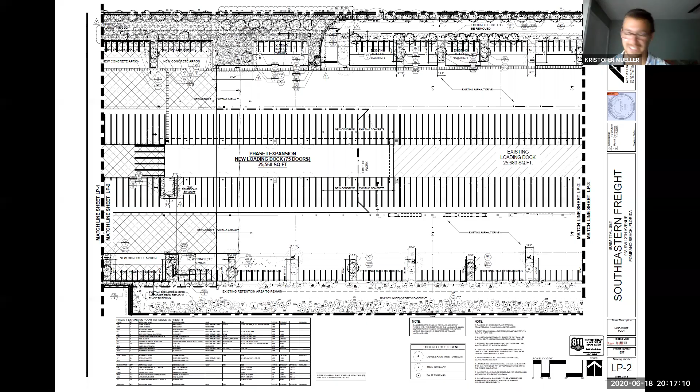Kristofer, I had another question. As far as when you're excavating to plant a tree, or putting sod down, sometimes they'll say you need to put down X amount of 50-50 soil or clean backfill. Is there anybody that actually does that? Who checks that, number one? Everyone's got to be competitive and cut corners somewhere, but does somebody actually go out there and say, yeah, there's 4 inches of soil, let's lay the sod, or this is excavated and we'll backfill with clean soil? Does anybody do that? How do you guys get away with that, I guess is my thing.

Or you can't speak about it. No, I'll speak about it. As a contractor, I think you have to know where you can cut corners and when you can't.

In Sunrise, with Peggy and Bill, I have to request inspections when I excavate a planting island. In Pompano, I think any planting island adjacent to a building has to be excavated 30 inches and backfilled. So there are times when you can kind of get away with it, and times when you actually have to do it.

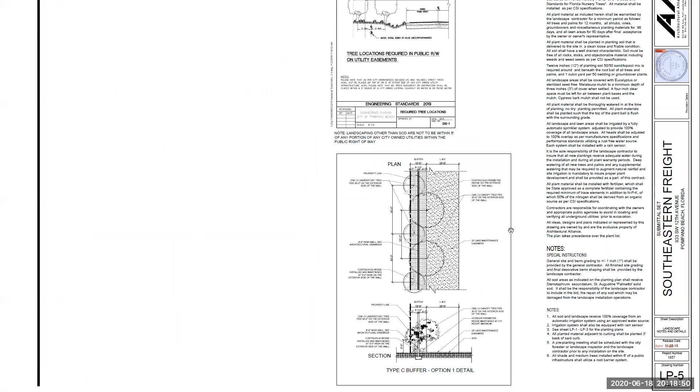One more question. What'd you bid that job at? This one? I'm just kidding. We're contracted, you can't take it. Yeah, I hear you. All right, well thanks man, I appreciate all the info. No problem, guys.

Here's just, usually there's more details, but here's your detail: 12 inches of planting soil mix is required around and beneath the root ball of all trees and palms, about 1 cubic yard per 50. So in this case, I'm pretty sure Wade in Pompano is going to tell his inspector to make sure they're digging out everything 12 inches.

Not to throw any shade at Pompano, but people bid jobs a lot higher when they're in Pompano because of the amount of inspections you have to pass there.

This will be my first job this year in Pompano, but we have another project manager who just finished, and he said he would excavate the island, call an inspection, request the dirt, call an inspection—they wanted to see the dirt—backfill the island, request an inspection, lay out the shrubs, not even plant them yet, lay them out, request an inspection, and then plant them.

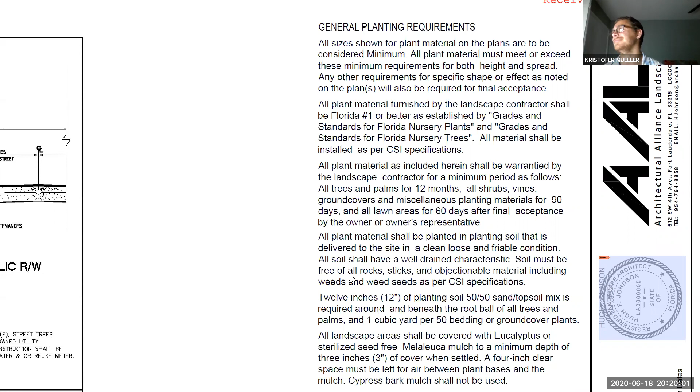So how do you calculate that into your bids? You can't. It's very time consuming to do it that way. For anybody else, I could do the job four times as fast, calling all the inspections and this and that just prolongs everything. So how do you calculate that kind of time involved with just laying out a simple island?

What we've done, and this has happened—I've been at Dixie Landscape for 5 years and I've seen it just in the time I've been there—it really kind of just comes from communication between project management and estimating.

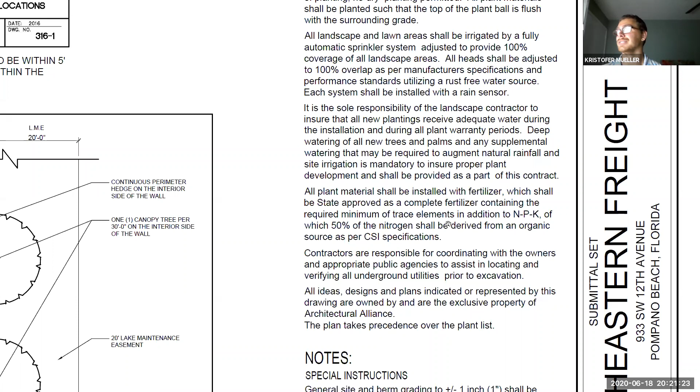Here's an interesting note: all sod areas indicated on the planting plan shall receive palmetto sod. That's not typical. Let's see what the plant list actually calls for, because I guarantee it probably calls for St. Augustine. Yeah, St. Augustine. So that palmetto is more expensive.

I have a question for you. Seaweed soil, or like a seaweed compost type thing, we use that a lot. Is there any research on the seaweed stuff? Yeah, because I work for the city of Fort Lauderdale, we use rakes and stuff to pick up seaweed along the beach, and we throw it in a big pile. It turns into sand after a while, or soil, and it works great as fill.

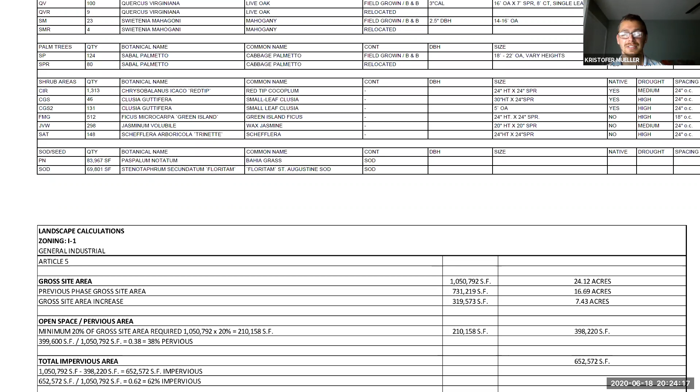So do they actually send you guys out to rake up the seaweed? Yeah, we have our own crews that rake the seaweed and dump it in a huge pile at one of the parks. To get rid of that pile, every time we need to plant something or backfill, we use that, and I haven't seen any problems or issues yet. Does it turn into like a dust? No, it's actually just soil, it turns into soil. That's interesting, I'm actually going to do some research about that. Yeah, could be a breakthrough, you need to hurry up and patent that so you can sell it. Maybe that could save you guys some money in the future.

Okay, all right, so here I'll pull up this drawing real quick, for root barrier. It doesn't show up on this landscape plan, but let's see if we can find it. I know for a fact this one has it. Usually it'll just show up as a dashed line. Here's the detail for it: install root barrier where trees or palms are planted within 10 feet of a paved surface. UB24, that's the one we pulled up the plastic for. This will be the detail for it, let me see if I can find it on the plans.

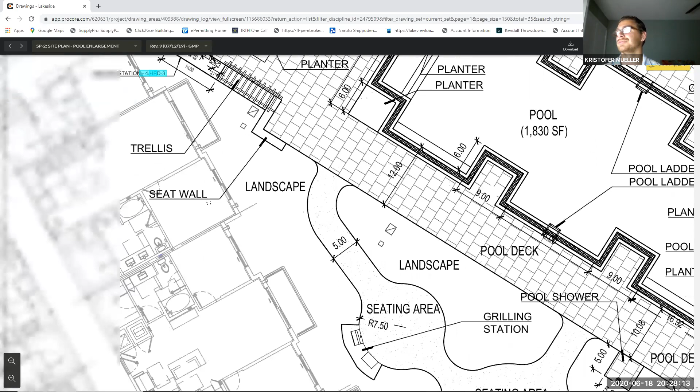This plan's in... I think it shows on the civil plans in this project. Site plan, see this. Oh, here you go. It should be somewhere here. No? I know it requires it around these planters, but I don't know which drawing it's on.

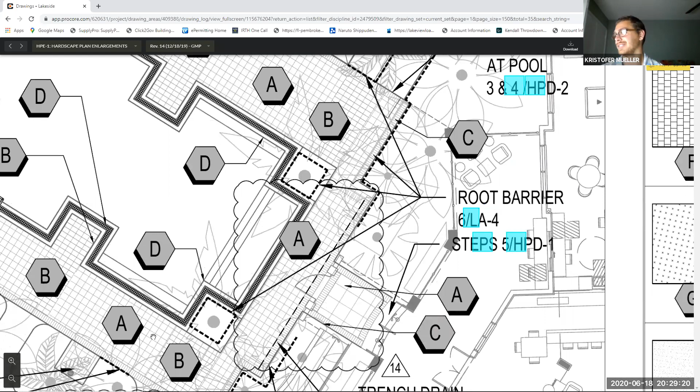Here you go, root barrier. It tells you the detail on the landscape plan, and then here it just shows a dashed line, so all this has to have root barrier. Most of the time, I'd say 90% of the time, it's on the landscape plan. These guys put it on their hardscape plan, which when you're bidding a job, most of the time as a landscape contractor you don't even look at the hardscape plan unless you're bidding the hardscape. This is something that could easily be missed on a bid just because it's on a different plan.

Hey Chris, one quick question. Yep. I know Dixie used to do a lot of work in Miami Beach, if I'm not mistaken. Did you happen to do that job in Surfside where they installed these gigantic... Gigantic what? You're still there, you cut out. I don't hear you.

But the answer to that question is no, I don't work in Miami Beach. We have another project manager. The way Dixie's kind of broken up is each manager handles a different area. We have a guy that does all of like Homestead up into Doral. We have a guy that does Doral all the way up to Broward. We have a guy that does the whole beach, everything on the East Coast. I do a lot of Broward jobs. They give me a lot of hard jobs for some reason. I don't like it.

Okay, what was it, you cut out? What they planted, large trees? They planted, like in Surfside, around 90th, 100th Street, 99th Street, there's a big huge condo, and they planted these gigantic banyan ficus trees with huge buttresses. They were heavily pruned back, I guess for transportation, and craned in, and the branches were strapped with ratchet ties and everything, and it's just massive. Unfortunately they suffered a lot of dieback. I haven't been by there in about 6 months, but they started sprouting out new foliage. But it was quite a feat, and I just wondered if Dixie had done that job or not.

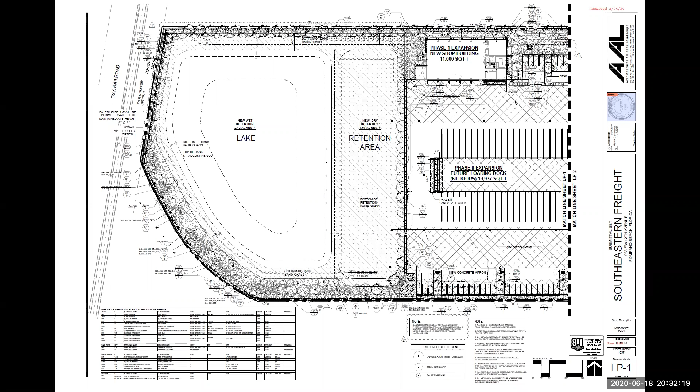Okay, but yeah guys, anyone have any other questions? One last one from me. Go ahead. Field adjustments, okay, how do you handle that? That's a good question. It's more like going back to your relationship with the inspector, and that happens 100% of the time, field adjustments.

Does it happen just with the inspector or also with the architect? It happens on site, and maybe the architect's involved like 10% of the time, little things. There's a light pole right here that didn't show on the plan, so this tree's got to move over because it's right there. That's what I see happens 90% of the time, it's like the light poles are in the same spot as the trees, so you got to move the trees over. Field adjustments.

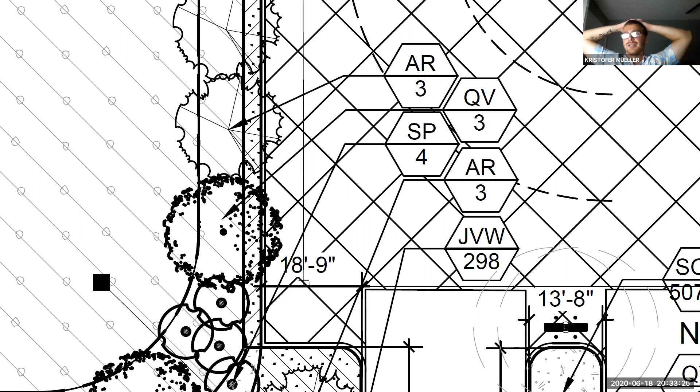Things up against houses - I've had jobs where we planted a tree 3 feet from a house, and the inspector came out and said, oh no, this is too close to the house, you got to move it out at least 7 feet or whatever they say. At that point you're not going to argue, you kind of just want to pass your inspection, so you say alright, we'll move it. So what happens, I guess it was more like 30 trees, you have to find a new spot for 30 trees. I mean the architect spec'd out whatever it is. I don't want to go 30, but like hey, 15 trees, and you can just tell, hey, this isn't going to work out.

So who do you reach out to if you've got 15 trees sitting here and need to get them in the ground within 2 days? How do you make it work where the architect's okay with it, the city's okay with it, and you're okay with it? And you're under the gun because those trees are going to die. So how do you handle that? Do you just make the call yourself as a landscape contractor and arborist, saying this is going to work and that's not going to work? That's a great question. I don't think there's a single answer for it.

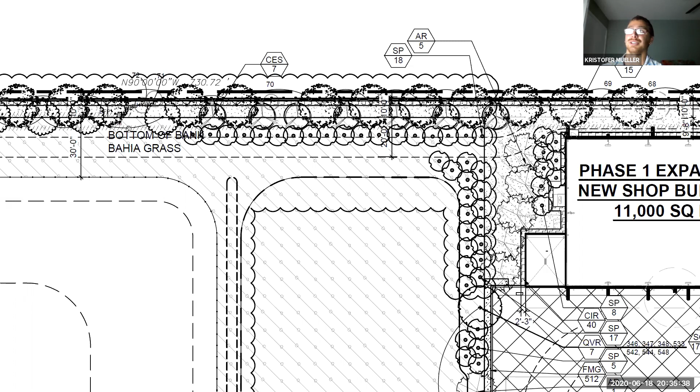I think it's more case by case. I've been yelled at personally by GCs for calling an architect and asking a question, like who are you to call the architect, you need to send an RFI. Each GC has their own process. If it's life or death for a tree, my gut says plant it temporarily somewhere, and if you have to move it later, you move it. If you have time, email the architect and copy the GC asking for direction. If you don't have time, plant it where the plan calls for, and if they change it, it becomes a change order.

Yeah, but some of those plans call for you to reach out to the architect, correct? Not necessarily the GC, but the architect is the one who created this plan, and you need to get with him. I've been in that situation too, where the GC says, why are you getting him involved? Well, he's the one that put this together. So I just wanted to know how you handled it.

Like if a light post is here, I can't plant that oak right next to it, so what do you want me to do? I'd always run it by the project manager of the company that hired us, because they hired you, so you're technically working for them. I'd say, I got this issue, it's a 911, and put it in an email just to cover your back. I delivered these trees and they can't be planted, they're going to die, I need immediate direction in an email after you talk to them.

They might say we'll call the architect, or you call the architect. But we have a saying in our office, cover your ass. So you have to send it in an email: these trees are going to die unless we get immediate direction, and we can't be held responsible. If you know the architect, like on a job that'll run a few months, by then I'll have spoken to them a couple times with the inspector, and it'll be as easy as a phone call, not a huge plan revision.